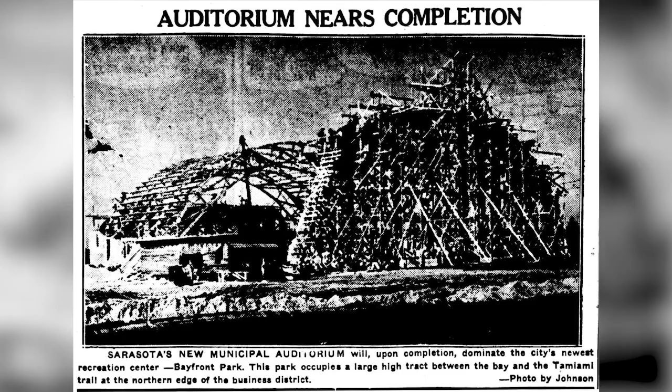The Sarasota Municipal Auditorium was commissioned to be part of the development of Sarasota into a more culturally significant city. And it was designed by Thomas Reed Martin and Clarence Martin in the Art Deco style, completed in 1938.

And its purpose was to serve as a kind of community public space, often used for exhibitions, community gatherings, big balls, graduations. It was used as the Army and Navy Club during World War II. And it was the largest, really, public gathering space in Sarasota for almost ever, actually. And it continues to be used for public events to this day.

The replacement of the windows of the upper floor of the community center was probably our biggest challenge, because the originals had been removed, replaced with jalousie windows, and it's wood frame. Original windows were steel, and we really only had 2 photographs to go by.

It wasn't absolutely clear where the sill height was, so we kind of proportioned from what we could see, the mullions, to discover that it was roughly the openings we had presently, but an extra kind of sill plate had been added. So we had to first determine what the original size of the windows was.

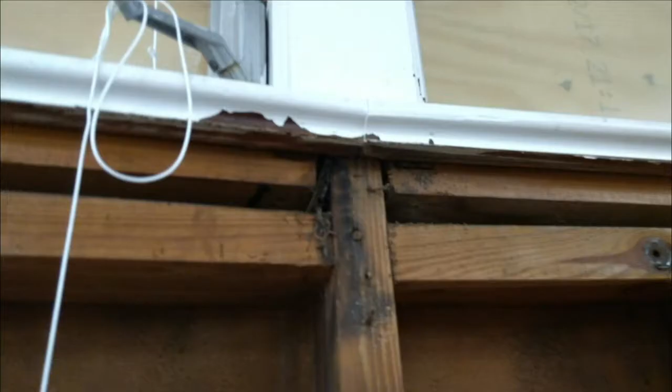We knew it was steel, but obviously this being Florida and needing to meet impact ratings, there were options as to how we were going to achieve this. It being a historic building, we did have the option of offering other forms of protection. We did not necessarily have to have impact-rated glazing and frame, which did increase the cost. But we did feel that this was something that we should do.

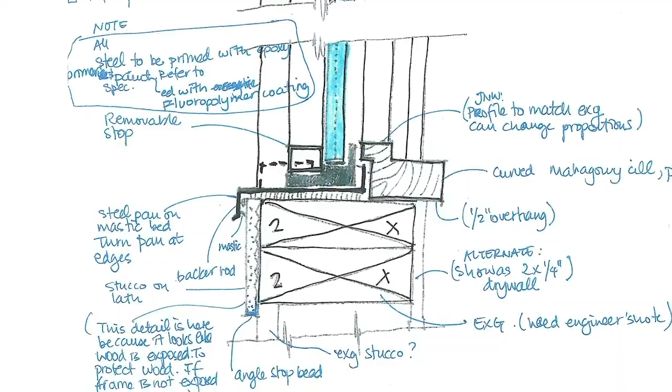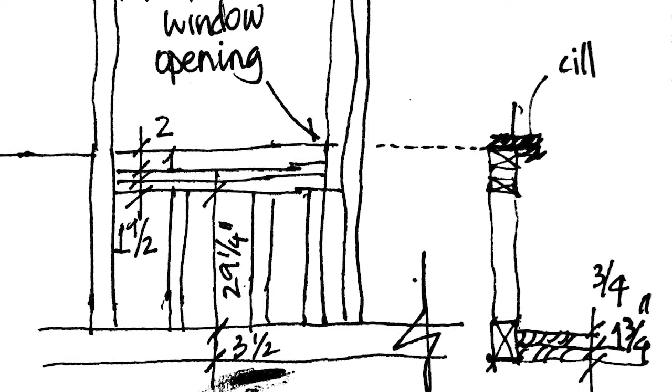However, doing that would increase the frame sizes, which would then make the building look different. And we were trying to bring it back to an original. So we did have a lot of discussions with our official at the City of Sarasota in charge of historic buildings. We also worked with the officials on the public works side in terms of its maintenance, how they saw using the building, what they currently do when there's a hurricane.

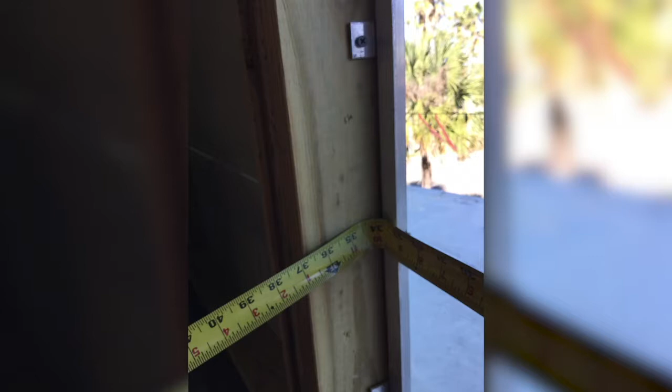Also, there was a limited budget, and there are very few manufacturers of steel-framed windows. It limited our price option as well. And we actually ended up doing a compromise. Our original design for the project was steel windows, replicating the original with impact-rated glazing.

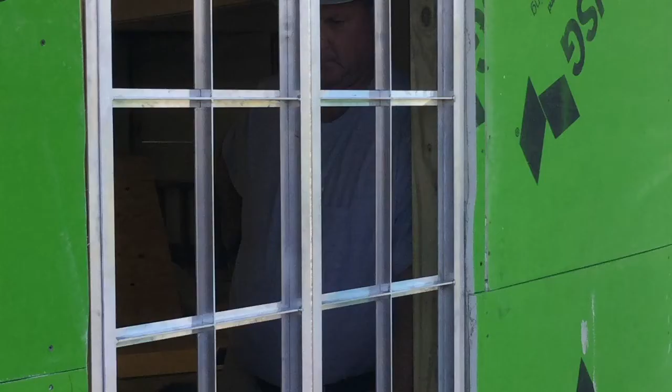But at the end of the day, what we ended up doing was going with a local manufacturer in aluminum, matching the sections, matching the dimensions of the original. So along the life of the project, due to budget and manufacturing restrictions, we did end up changing that. But the end result actually came out very well.

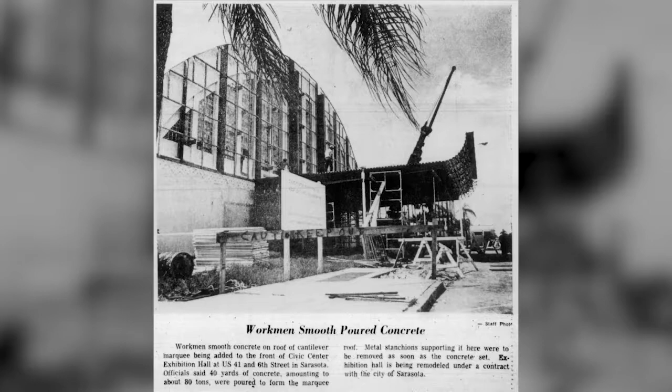It does bring out the proportions of the original design, and bringing it back to the original has been a great addition to the experience that you have in that upper floor. This renovation project, and it's not the first one that this building has had, is possibly the one that brings it back to its original glory.

It's also highlighted the building. It's made people more aware of its potential, and it's going to encourage people to apply for future grants and hopefully follow in the same direction.